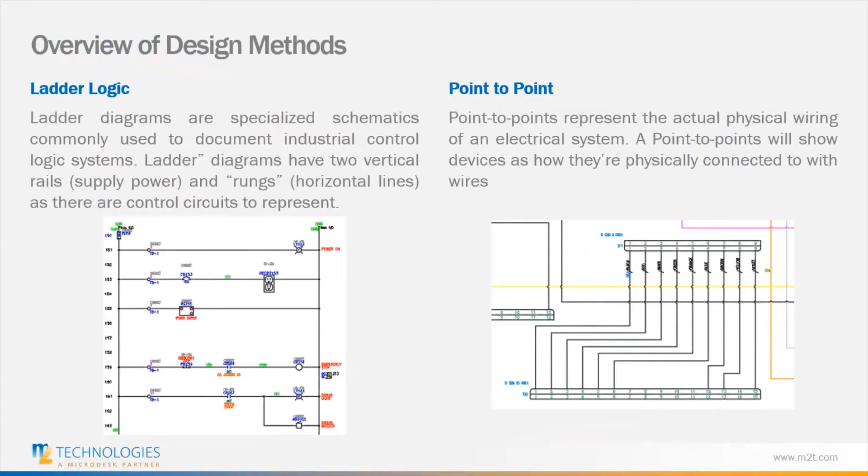And point to point is really straightforward. People could easily understand how it's connected together. Whereas the ladder logic, if you're looking at this, you may not know exactly how it's wired together. And there's some tools in there, like the wire sequences, that you really have to go through and manage so you get proper to-from reports out of a ladder logic document that you don't have to do when you're doing point-to-point wiring.

So the component library really is one of the most important things in AutoCAD Electrical, and it's the thing that's going to really drive you towards excellence in creating your designs. And that's because this library contains over 2,000 symbols out of the box for you, conforming to a wide variety of different standards. So anything from AS to GB, IEC, or more commonly in the States, the JIC and the NFPA, maybe IEEE too. You can see there's just a ton of standards built into here.

Now, the one thing that I think it could use some improvement on are the connectors, specifically when you're talking about the physical footprint and even the catalog database. Even though there's probably hundreds of thousands of components in the catalog database, it's probably not quite as in depth as you'd need if your focus is strictly on creating a point-to-point wiring schematic. And that's why I really want to explore that area first.

So, creating a custom component. I'm going to take you through some of the steps, not all the steps, but I'll make sure to give you the full picture. Inside of Electrical, there are several different pieces that go together to make a complete component. One of the first things is the actual symbol itself. Now the symbol really could be two symbols if you think about it. You could have a schematic representation, and hopefully you just use the connectors that are available from AutoCAD Electrical, although you could create custom schematic symbols too. But really, I'm focusing on the footprint side.

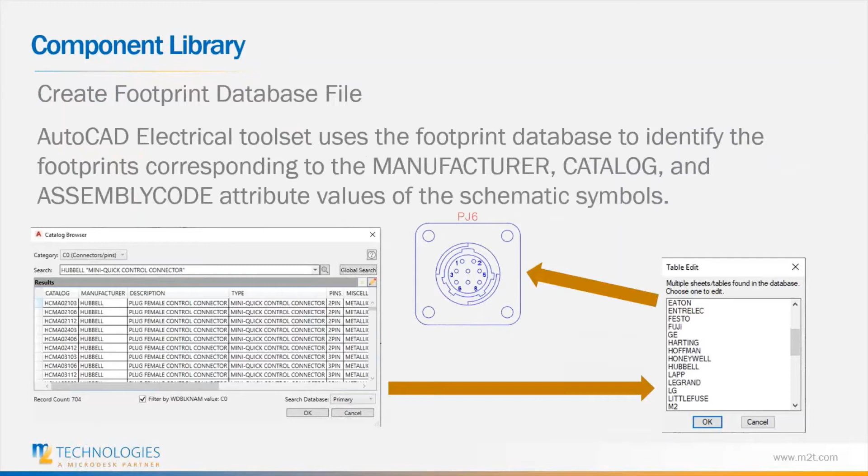And then you also have a footprint lookup database. Basically what that does is tie the manufacturer catalog number to a specific block, so it allows the software to be able to find it and place it. So you can see there's symbol creation, there's a catalog database, there's a footprint lookup database. There's 3 different pieces that generally have to be touched, and probably even 4 if you want to have it in the icon menu so you can place it easier. So 3 or 4 different pieces are involved in creating a custom component. Let's go ahead and take a look at the first piece.

So I'm inside of AutoCAD Electrical now, and I have some components that have already been created as AutoCAD Electrical blocks. So that process is really done for us already. But what I want to do is just maybe explode one of these so you can see it. I'll just select that component, explode it, and there you go. You can see it's the same type of information we just saw in the PowerPoint a moment before.

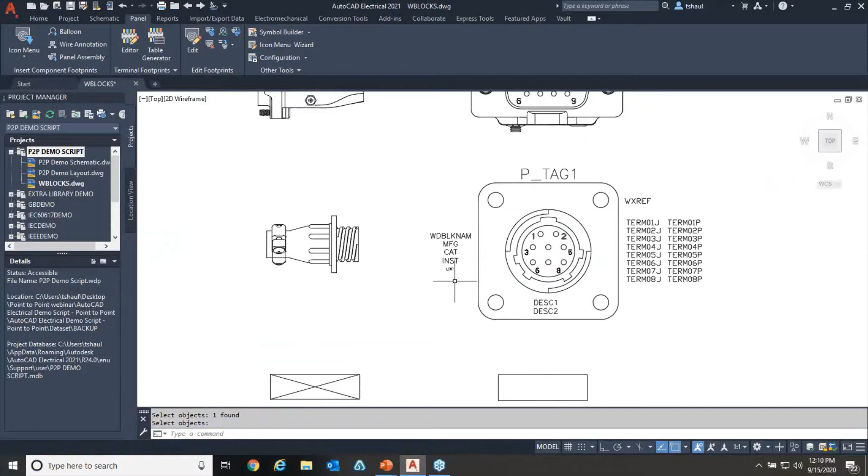So all these attributes that are associated to this block, super important. It's very important you follow the process to build the symbols properly. And this is something that we cover in our training. And the tool that you'd use to create that is called the Symbol Builder. The Symbol Builder is located on several different tabs here. On the Schematic tab, we have a Symbol Builder. On the Panel tab, we have a Symbol Builder.

And basically what it does is it's like an authoring tool using the block environment inside of AutoCAD Electrical, very similar to AutoCAD, and basically just has a palette that tells you what attributes should be added, and it makes it very easy to add those attributes to the component.

Okay, so I'm not going to go through that whole process, but just know it's called the Symbol Builder, and that's what you use to apply the block properties to specific geometry so you can build in the intelligence that you want into that symbol itself. And like I said, we do cover that in our training if you wanted to take the next step.

So with that part being done already, some of the other areas that have to be explored are maybe the footprint lookup database. You'll notice here in AutoCAD Electrical, we have several different tabs, a schematic tab and a panel tab, and a footprint is generally associated with the panel environment. So this is where you're going to find the tool to basically link up the catalog database to the actual component itself, the physical representation of that block. It's a little bit hidden here under the other tools.

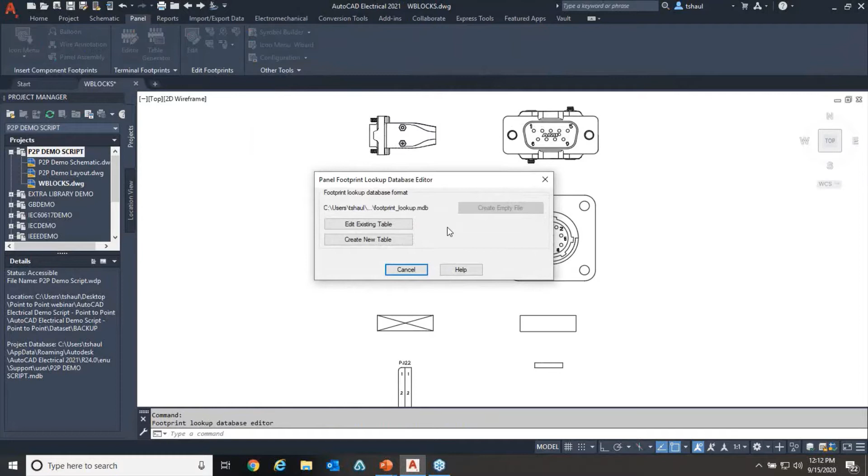And when I open this up, there's a couple different options. We could edit an existing table, or we could create a new table. In this case, I'm actually going to create a new table. I'm going to call that AMP for the type of symbols I'm creating. And we have this blank environment right now because I haven't created any of these components before. I'd say add new, and this is where I'm going to put in things like the catalog information.

So if I know this AMP part number starts with like a 205841-1, and I'm going to put an asterisk in here too. And basically, when you have components, and I'm going to use like a pilot light as an example, maybe you got a green one, a red one, a blue one, an orange one, a white one. They could be all sorts of different colors, but really the physical representation might be exactly the same for all those components. So the catalog number could be a variety of catalog numbers.

And basically by putting that asterisk in there, in this case, it's a wildcard. So it allows it to say anything that starts with these numbers specifically. However, after 1, it could be any number. It doesn't matter. And that would be a wide variety of different, maybe connectors in this case, or pilot lights as my example.

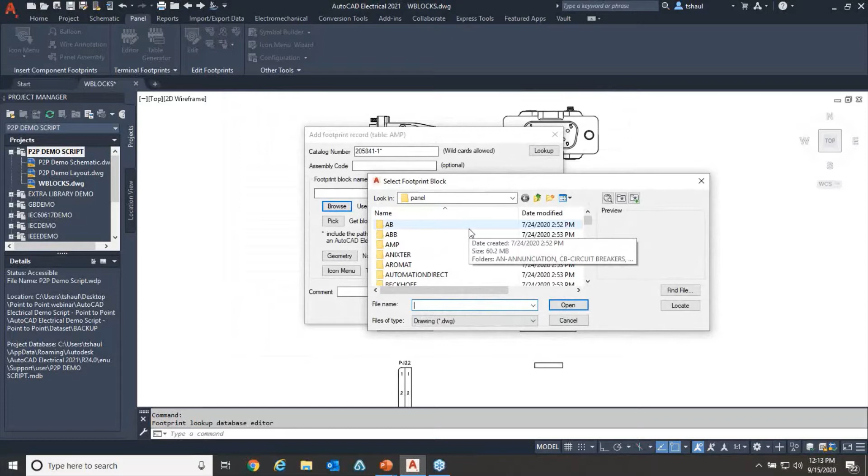Okay. The next thing I'm going to do is tell it what block should be used when I use that catalog number with the wildcards. So I'd browse out, and inside of AutoCAD Electrical, when you install it, there's 2,000 or more symbols. And I actually created a new folder here where I saved my previously created symbols. I'm going to go ahead and select the symbol that I'd like to use for this footprint. So anytime I use this catalog number, it's going to pull this footprint. Simply click OK, and now I've got a new one in there.

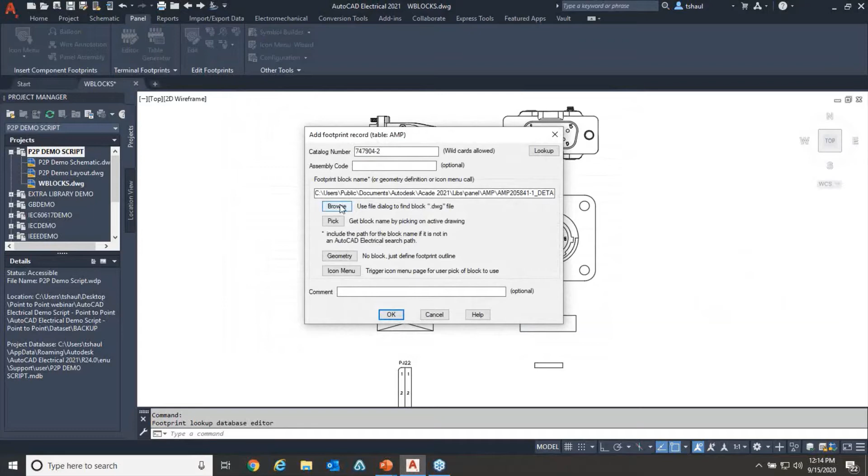And of course, I could add another record here. So maybe in this case, we've got a 747904-2. And again, I'm going to browse out, identify the block that I want to use with it, and click OK. And basically, that's what goes into setting up a relationship between the catalog database and the physical footprint representation of the symbol.

And the reason I wanted to make sure I showed this is because I believe this is one of the areas that could use some expansion in the standard catalog database. So you'll find that when you're doing point-to-point with connectors, especially something that you'd use on a cable, it's more likely that you're going to have to go through and create these custom symbols.

Okay, so I wanted to make sure to show that. Now, the next step in this process might involve actually placing these into an area of easy access. So if I'm going to use this connector a lot and I want to access it quickly, and when you're using AutoCAD Electrical, if you're not familiar with it, one of the most common ways to place a component is through the icon menu. So when I click on this, it's going to open up the icon menu, and this one's specific to the footprint environment.

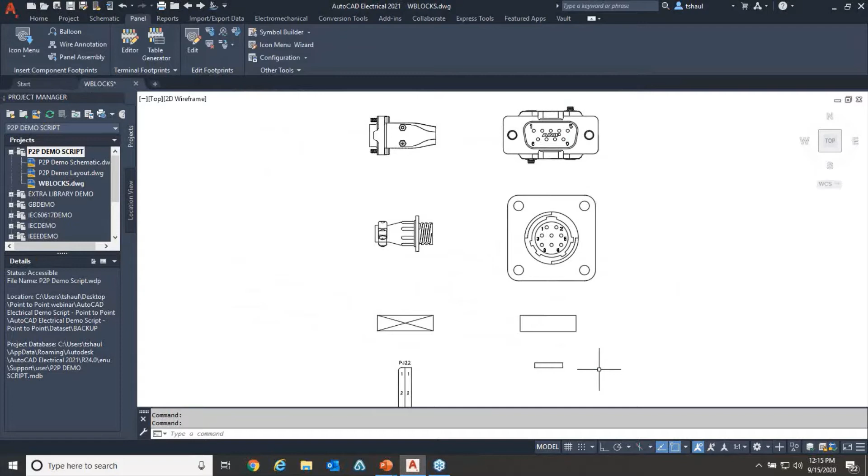You'll notice all the different types of components in here, and none of these really say connectors. Okay, so maybe what I want to do is create my own custom icon menu, submenu, and include the connectors that I just created, so they're easily placed into a design. Okay, and we do this through the icon menu wizard.

And there's several different icon menus to choose from. There's a schematic, there's a panel, there's actually a pneumatic and hydraulic and P&ID ones as well. You can even create your own custom ones if you want. In this case, I'm going to modify the standard one that's available out of the box. I'm going to go ahead and select OK here.

You can see basically the interface looks exactly the same. The only real difference here is you have this additional button in the upper right hand corner that says Add. And if I go in here, I can add several different things. I'm going to start off with a new submenu, and I'm going to call this just connectors. So connectors. Then I need an image.

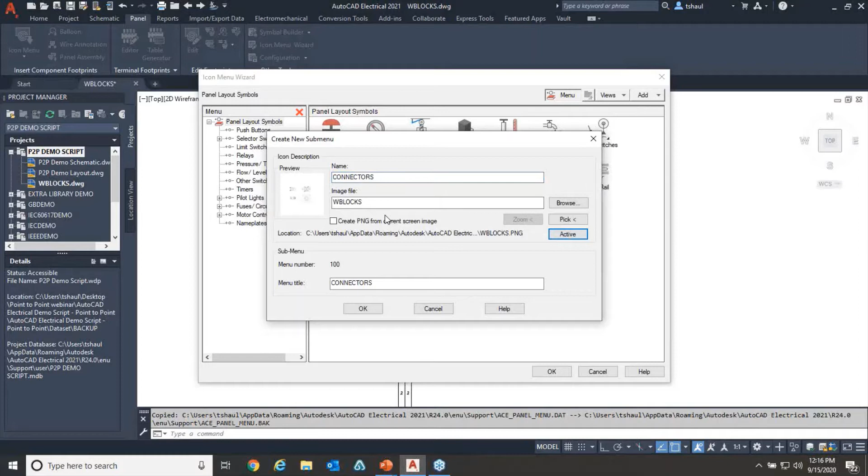I could use the active window if I want to, so it's going to grab a screen capture of the active window. A lot of times you'll find that you want to kind of modify and create the file ahead of time, so you get a nice, pretty image that stands out. You can see a lot of the images in the icon menu are probably created in like Microsoft Paint or something like that. This is simply just a screen capture in this case. I'm going to select OK, and you can see it doesn't stand out quite as nice. And then I'll dig into this submenu.

I'm going to select component, and this is how I could go through and add specific components now. So I'm going to call this connector-01. For the image file, I'm going to browse out. Let's say we want to use this one. So I've already pre-created that one. I was kind of zoomed in a little bit more.

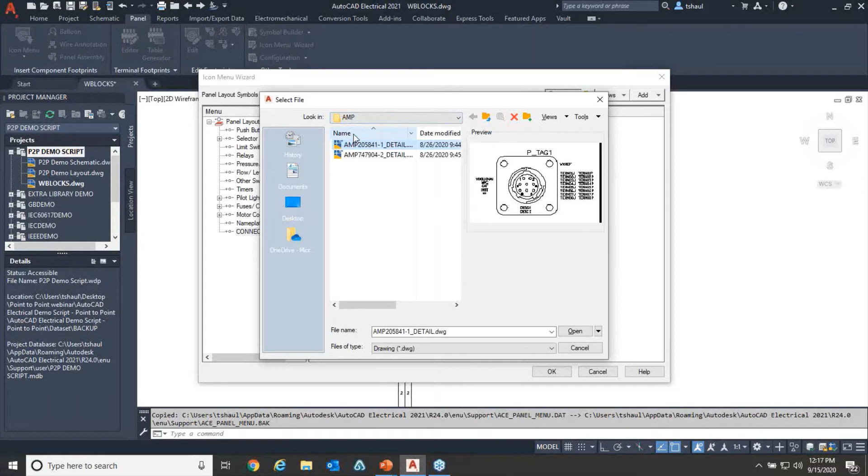And then I need to tell it what block is associated with it. So I'd navigate out. And again, these are just going to my AMP folder that I've created in my catalog location already. Going to select OK. Going to click OK. And basically now I have that new connector in there. And then I could, of course, continue on if I wanted to create another one here.

Maybe this would be connector 02. Again, I'll browse out. I'll just grab a screen capture that I created for it. Going to browse out and grab the appropriate block for that. And now you can see I've added those in there. And that message was basically saying I had done those ones before. So it remembers when I was preparing for this that I had already done that. So that's nothing to worry about. But basically, you can see it's a pretty simple process.

And when I click OK here, when I'm creating a panel or a cable in this case, I could go to the icon menu. And now I could go in and select from these different connectors. Now in this case, I only put one view in there. I could have certainly included multiple views for the same connector in there.

So if I needed a front and right side or left side or top view or whatever it happened to be, you can incorporate those all into the same symbol and just maintain the view that you want to keep, or even keep both views. That'd be okay too. So it all depends on what you're trying to achieve when you create these different schematic symbols and panel symbols and footprint layouts.

So I think you can see the process isn't really difficult. It does have several different pieces that are going to work together to create your final component. But once you get the process down, it's pretty straightforward. And most of the time, you can actually grab all the geometry from the manufacturer.

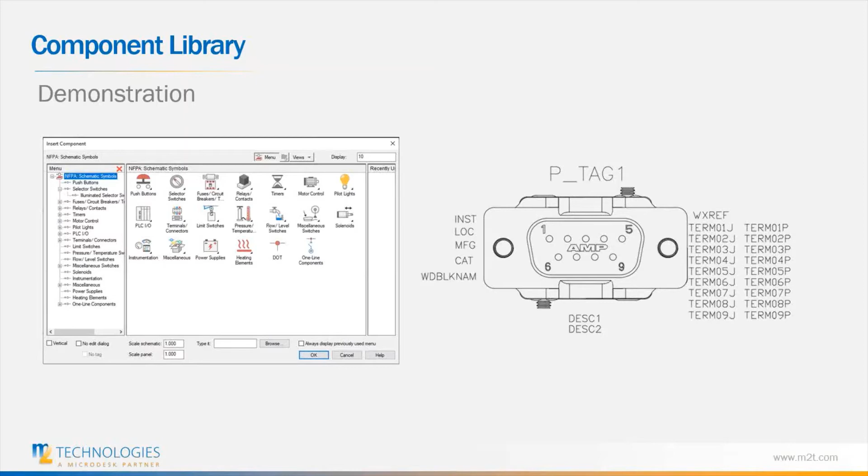So you could go to the manufacturer's site and usually just download these. The only thing you have to do afterwards is make sure you take it through the symbols wizard or icon wizard, so you can build those out and add all the attributes that you want to it. Okay, the symbols builder. So let's go ahead and move on to the next thing.

So once you've authored some of the components that you have, now it's time to maybe start the design. Now, I'm going to assume that we're going to start the design in the schematic environment. The schematic environment would involve that point-to-point connection, and the point-to-point connection you're going to make using what are called wires.

Okay, so if you're using AutoCAD today, if you're drawing a line, it isn't technically a wire, I guess. But a wire essentially is a layer, but it has a certain naming convention that the software recognizes, and that naming convention is what really gives it its intelligence — what color it is, what gauge it is. You can include a variety of different user parameters or properties into that naming convention too if you want, so it could be a really simple or complex naming convention, but generally at the root of it, it's a color, a gauge, and then it's applied to a specific wire layer. And that's how the software knows that it's a wire, because it exists on that wire layer.

Now you could insert wires individually, one at a time, or you could actually use some multiple wire bus commands, giving you the ability to insert multiple wires at a time.

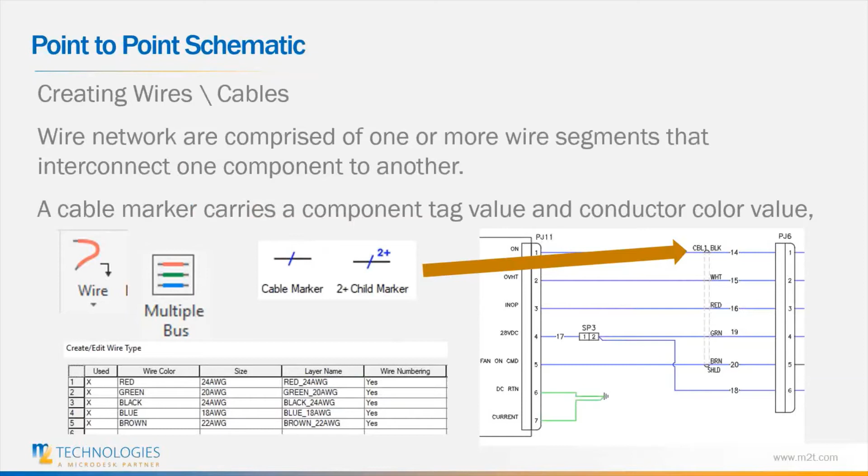So that's basically building a relationship between essentially wires. You drop in a parent marker that has the catalog data, then every conductor gets a second marker, which is considered a child. That makes sure you could build references between the parent and child, because you're not going to have the cable catalog number called out for each conductor — then you'd end up with 5 of the same cable. You don't want 5 parents in there; you want one parent with the catalog information, then all these conductors are children, which just inherit that same catalog information. So basically it's one catalog number as opposed to like 5, because you want your bill of materials to show properly as well.

Now, once you get your wires in there, you're probably going to want to number those wires. This is one of the big advantages of AutoCAD Electrical too — you can use the automatic wiring tools, and these wiring tools, the numbering specifically, has properties associated with it. So you could create what are called project definitions or project properties for how you would like to number things. And because in this case we're using a point-to-point wiring scheme, you'd typically use a sequential wire numbering scheme for those, so it just starts at, say, 1 and goes to 100, all in order. There's a number of different ones that are available from the system.

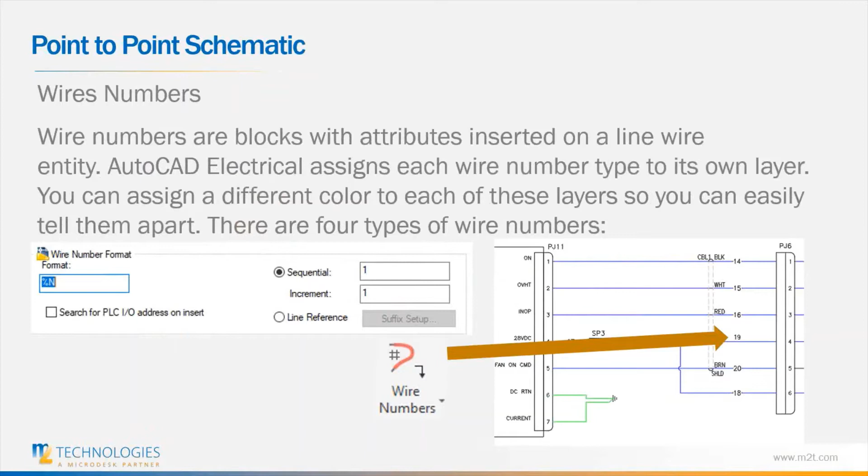So you could also do PLC I/O addressing — if you have some PLCs in there, it'll have the address as the wire number. And in other cases, say if you did have that ladder logic, that's when you generally use a reference line number, and you could apply those really quickly.

Now the next thing is the connectors. You don't have to create custom connectors in the system. So if you wanted that connector to look a certain way, I don't know that that would be necessary, because there's actually a connector tool built into the software that makes adding connectors very easy and very generic, as far as the schematic side.

Now on the footprint side, it's a different story. You want to create your custom footprints for those. But generally, out of the box, this connector command works just fine for the connectors you want to create. It really doesn't matter what they look like in the schematic, as long as they have pinpoints and maybe definitions for the pin locations. Doesn't really matter what they look like, okay?

Now, in this case, we're mostly focusing on connectors, but if you had a custom power supply with pin locations on it, you would probably want to create that as a schematic component and document all the pins and pin connection points. But in our case, since we're mostly focusing on a cable design, the connectors are what we really care about, and how we're going to apply the different wires and multi-wire bus to get to the final cable result in the layout.

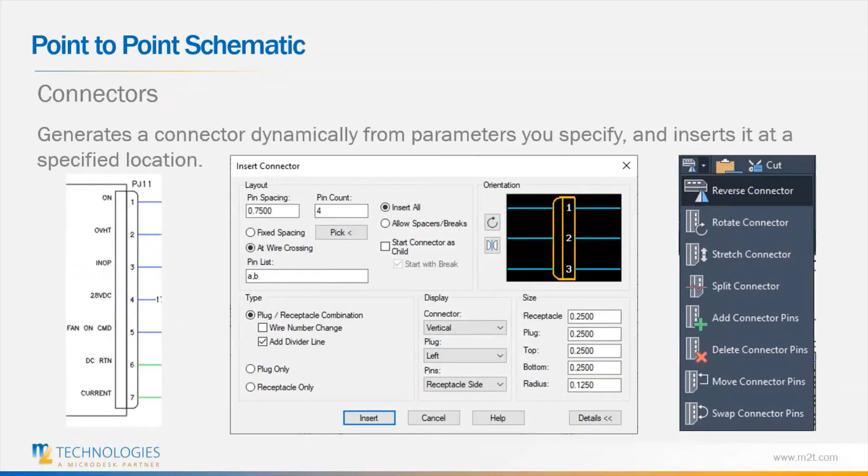Also, the connectors, since they are so flexible, offer a variety of editing tools. Once you place a connector in there, you can rotate it, stretch it, add additional pins, subtract pins, even move pins and swap pins around. You get a lot of control over it. If you create that power supply with those pinpoints, it's not going to have that type of flexibility. Or even if you created your own custom connector, it's pretty much going to be static, whereas this connector tool gives great flexibility in how you can add and work with those connectors. So I highly encourage people to use these connectors as much as you can. Don't create any extra work for yourself.

Okay, so let's go ahead and take a look at that. We're going to move off of this drawing sheet.

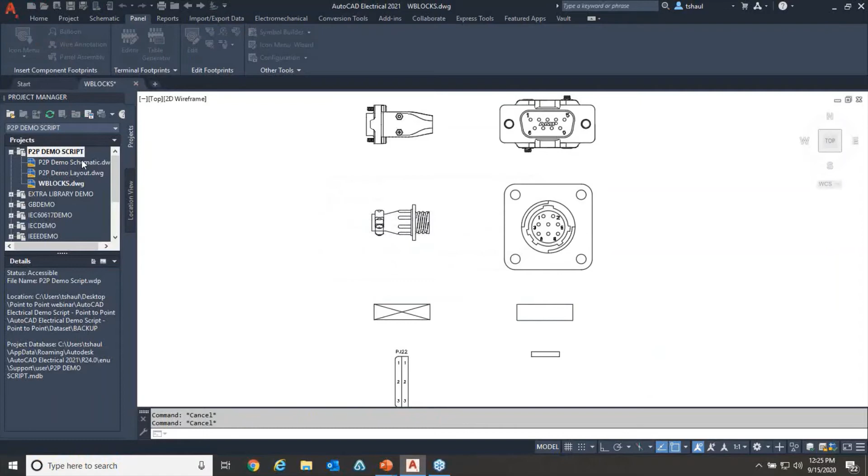Okay, so here we are in the schematic. In this particular case, what we're going to do is finish up this cooling fan circuit. So you can see down here we have a fan control PC assembly. Even though this is probably a purchase component, a connector was just inserted on top of it, so you could still take advantage of all those connector tools. So it really depends on how you want to leverage the tools.

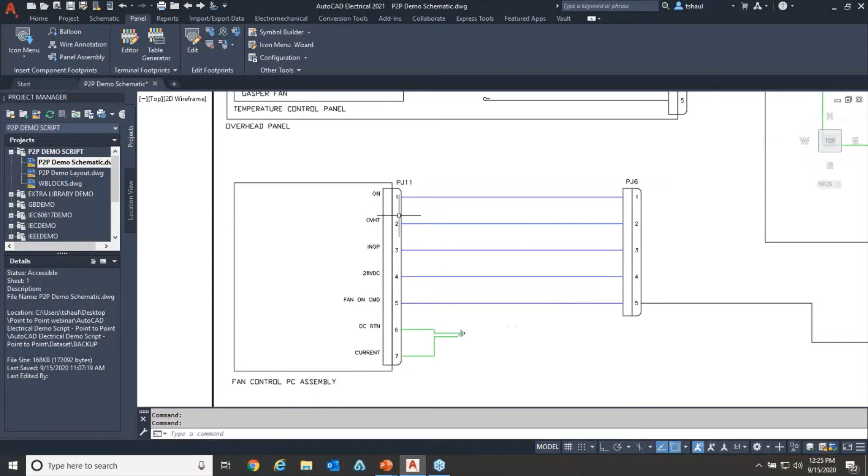The connectors make it really easy. We have some overhead panel here, a circuit breaker, some lighting distribution panel, just all these different areas. But really what it comes down to is we just want to finish this circuit, and our main focus is going to be on that fan temperature control. So the fan's going to kick on if it gets too hot.

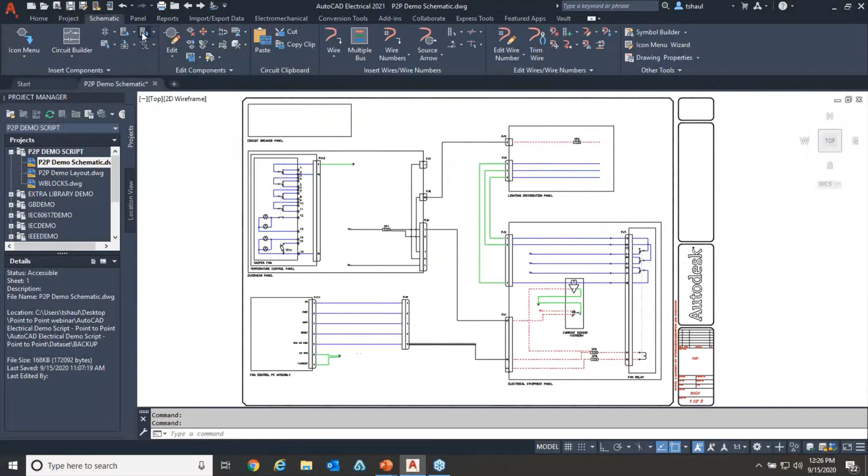So the first thing that I'm going to focus on here is the connector itself. Now the connector is actually found on the schematic tab, so this is a schematic tool, and it's on the insert components panel. I'm going to go ahead and select this, and there's a variety of different options in this dialog box.

The first thing that we're going to do is really define what we want this connector to be. So what's our pin spacing? In this case, 3/4 inch. That sounds pretty good. For the circuit breaker, we only need 2 pins, so I'm going to key in 2 pins. I'm also going to set this to be a fixed spacing, so regardless of where I place this into the design, it's always going to be 3/4 inch spacing between those pins.

I'm also going to create a pin list. So I want the pins to be 1, 5. And the reason I want to do 1, 5 is because this connector is going to have a parent-child relationship, just like I spoke about with that cable. It's nice to be able to do this because you could literally place the pins to a connector in multiple different locations in the context of your project, in the same drawing, or even maybe a different drawing. Doesn't really matter.

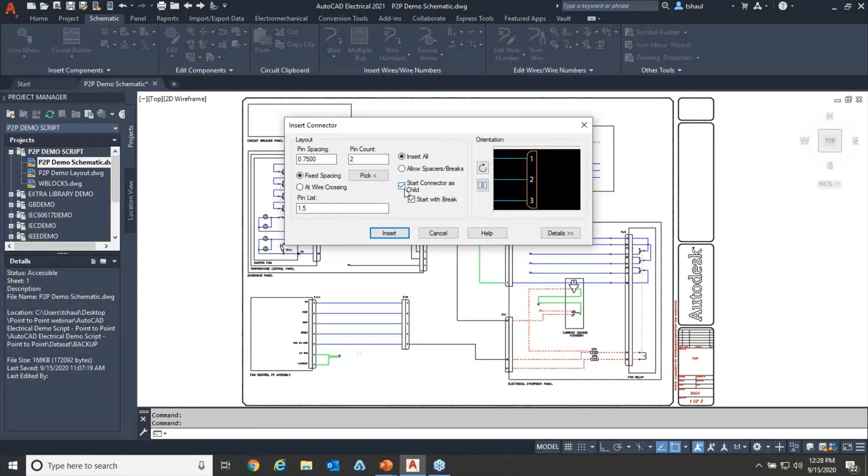Okay, and to turn on that child-parent relationship, right here, start connector as child. So this is going to be a child connector, which means I am going to have to build a relationship with this connector to the parent, where it's going to get all of its information from.

Okay, now in here I'm going to expand the details area a little bit, and I do want to place in both the plug and receptacle. You'll notice different options in here—you can do the plug side or receptacle side only, control the pin locations, whether you want those on the plug or receptacle side. There's lots of different options here. You can even control the size of the connector itself if you want to adjust the geometric values, and there's controls for positioning it, flipping it, and so on.

I'm going to leave it in that orientation right there. I think I've got everything I need—so 1 and 5, 2 pins, all child. Yep, looks good. I'm going to go ahead and insert this.

Basically when I insert this, it's going to be attached to my cursor, and you'll notice the arrow. The arrow is basically showing me what side it is—is it the receptacle or the plug side? In this case, I could tell the arrow is pointing the wrong direction. So even if you didn't have the direction set properly, you can use different tools on your keyboard to flip it—tab will flip it, or you can type V for horizontal or vertical.

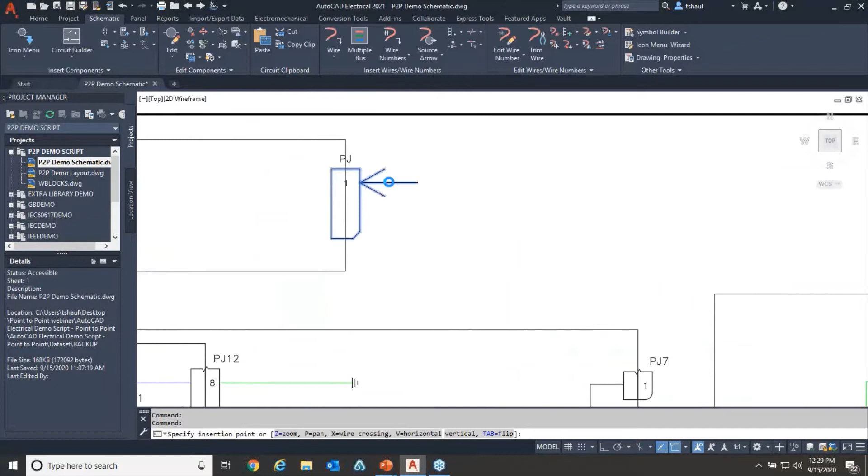Once you get it into the proper orientation, I'm going to go ahead and make sure this is connected right to my circuit breaker. Remember, my circuit breaker in this case is just this kind of generic reference—I really care about just that connector that's going to attach to it.

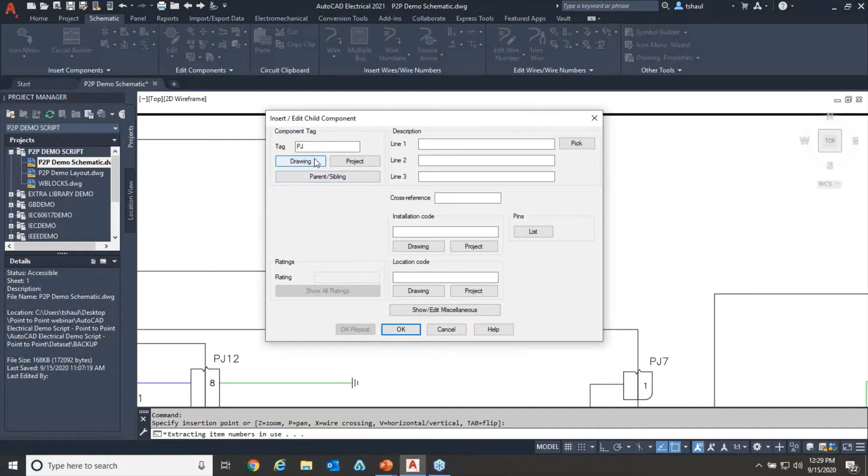Now in this case I have the child component insert and edit dialog box, and this is where you could build in that parent-sibling relationship. That sibling relationship can either be in the same drawing, across project drawings, or I can pick it from the existing drawing. In this case, I know I want this connector to be basically the same as this connector, so it's going to be a PJ8. You'll see in here it's automatically going to consume that kit tag, making it part of this component because it's a child—same component, one catalog number, spread across this drawing in multiple locations, or between drawing sheets too.

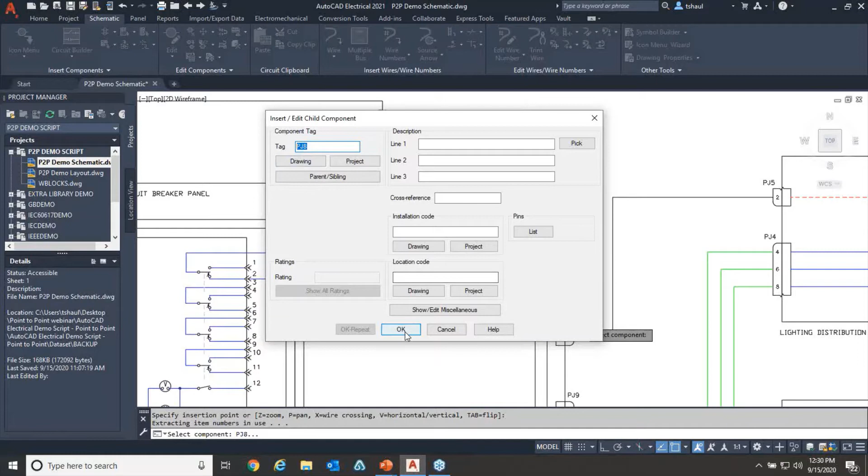So that looks pretty good, I'm going to go ahead and select OK. I've built in that relationship. I can see here that the tag didn't really end up in a great location, and keep in mind these are AutoCAD blocks, so it's going to have the default attribute location.

AutoCAD Electrical does offer a number of tools for working with those attributes after placement. In this case, I just want to do a simple move operation, but you can do a number of different operations with your attributed text after the fact. The cool thing is it's only going to affect the one block you've inserted there—if there are other blocks that are essentially the same, it has no effect on those or their attribute placement. It only affects the one I'm touching.

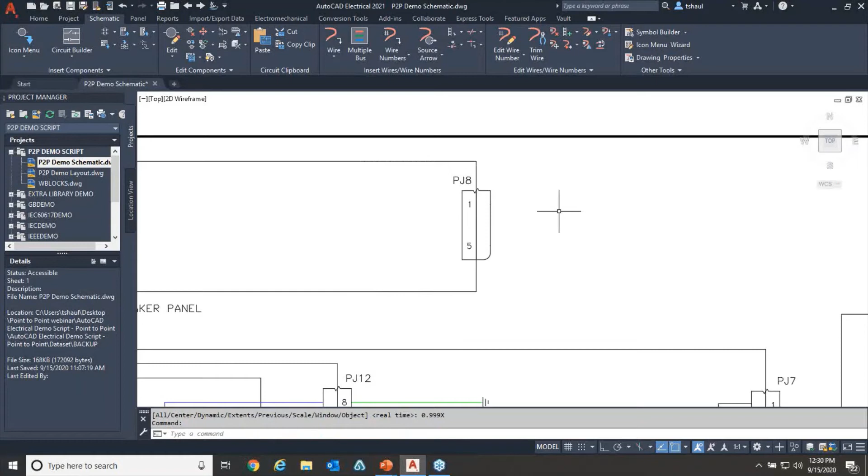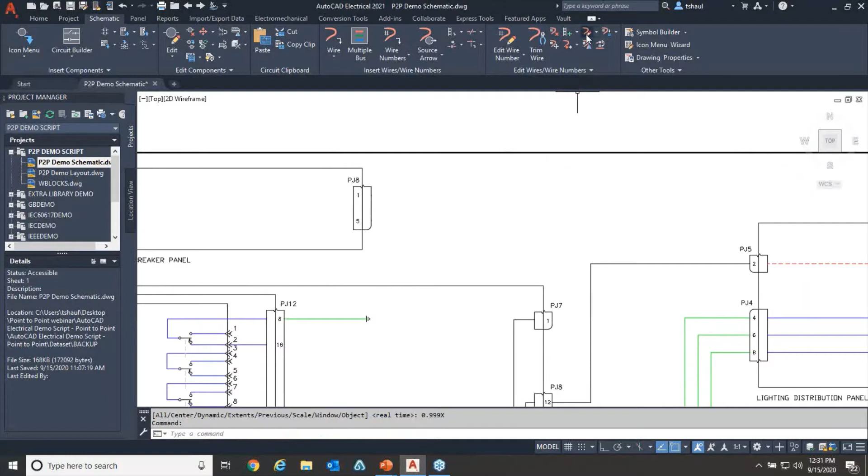All right, so let's start a little wiring here. The thing is, remember, wires and lines aren't the same thing. If you've worked with AutoCAD for years, you've been drawing lines and are very familiar with that rubber band line it creates at any angle, creating one line at a time. One of the first things that generally has to be done is the creation of wires.

Now, when I talk to customers, when I'm consulting with them and building out the wire types, usually we'll define a list that they want, and then as part of the template, we'll actually build these into the template.

For example, if I wanted another brown wire type here, I type in brown and hit tab, and you'll notice this is the layer name—it's going to fill that in. Then I'll go with the gauge, so maybe 18 AWG. So we've got two brown wires in this file and multiple other wire colors as well.

What I can do here is also adjust the layer properties, things like the color—so since I know this is a brown wire, maybe I'll select the brown color for that.

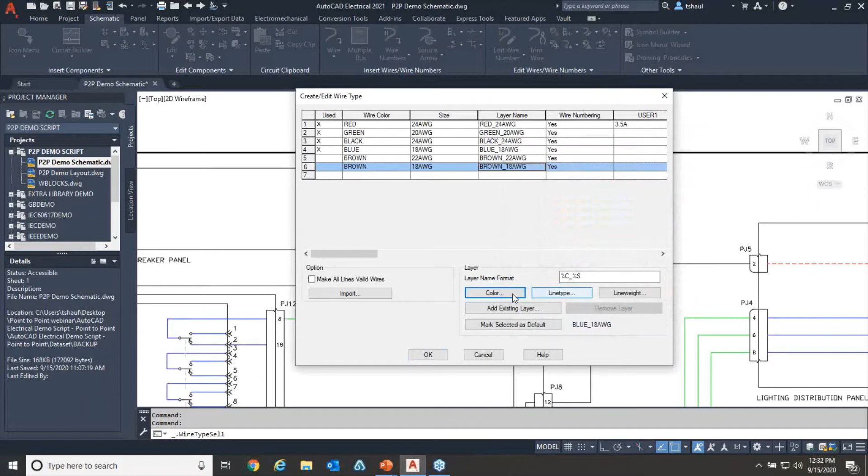I could also do different line types. I've run across a number of customers that have used hidden lines for field wiring and things like that. And you could certainly adjust this as needed for your needs. And once I have the wire configuration set in here, I'll just click OK. And now I'm ready to place a wire.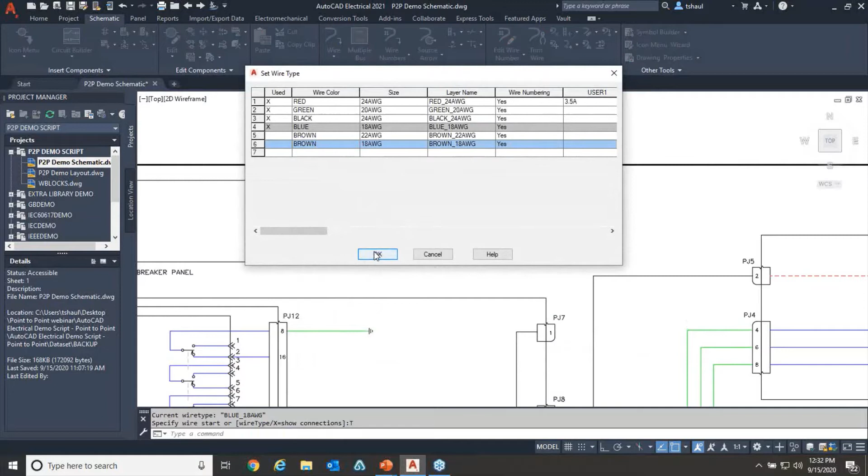So I'm going to place a single wire using the wire command. And what I want to do is make sure I'm using the right wire. Of course, you'll use one as the default, the one you use most frequently. But if I type in T, enter, this allows me to change the wire type as I'm placing a wire. So it's really handy. I could just come in here and say, okay, I want to use that brown 18 gauge wire that I just created. I'm going to select OK. And now I'm creating this wire.

And I'm just going to simply click over here. It's going to grab the connection point to the connector, and then I can drag this out. So look at how it's creating this wire. It's two line segments at a time at a minimum. So it's not like a line command where you're just doing point to point. And even beyond that, if I come down here and say I want to connect to this other connector, it has some avoidance technology built in. So it understands that this connection should go straight into that connector. So it's going to add an additional wire segment and also try to avoid anything that's in the way.

Now, does it avoid everything all the time? Well, not really, but it does help you in many cases to make it easier to insert your wires because it's using that technology to avoid other wires and connectors. Sometimes things can't be avoided. All right, so you can see there, very quick and easy. I was able to go in and create a new wire type and insert that. Looks good, but there's still a couple more connectors that I need to create.

So I'm going to slide over a little bit. You can see we have our lighting distribution panel, and we want to place another connector in here. So I'm going to go back to my connector command, and in this case it's not a child component, and it's going to have four. You can see there's four wires out there that I want to connect it to. The pin list is a little bit different. It's going to be an alpha pin list, so A and B.

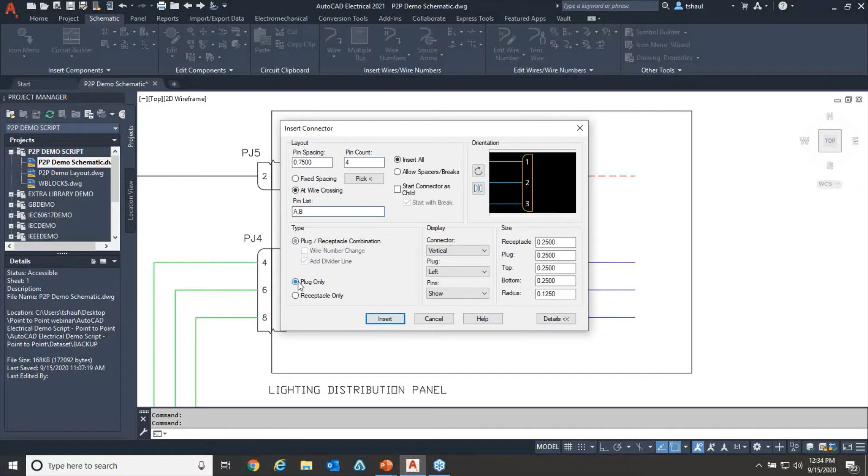And one of the most important things here is the at wire crossing option. What that's going to allow the connector to do is be more flexible. So if you've already got the wires in there, and maybe they're even at different spacings, like this example here, you can see we've got the red wire up there, and then these three blue ones down there, it can accommodate for that. And also in this case, I'm just going to place the plug side. So I'm going to go ahead and insert this.

And you'll notice I've got it attached to my cursor again. And if I go up to this wire at the very top, it's going to highlight. It's a little hard to see there. There's a little graphical change that you see in the connector. But if I click, what you'll notice is it's going to put all those pins wherever it crosses a wire, which is really handy. If you've got a ton of wires in there already, you have the design in there the way you want, the connector conforms to whatever is already existing. So really flexible and easy to place in there.

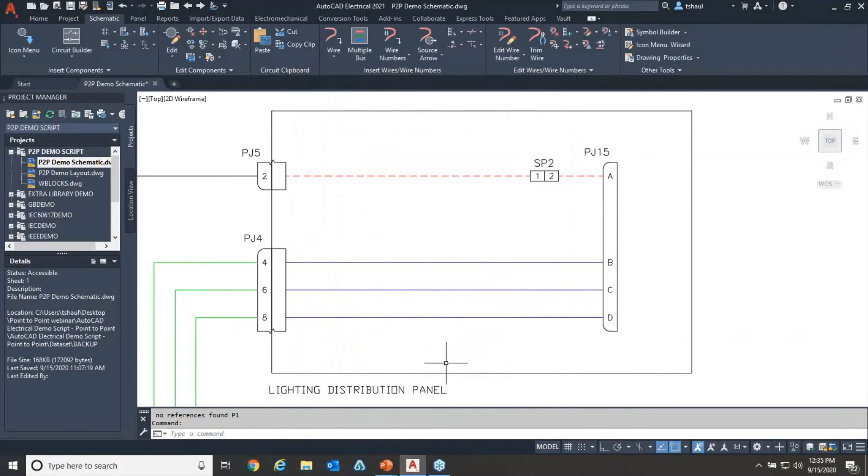And there it is. And you know what? Let me go ahead and just change this connector tag. So this is going to be a PJ15. Let's click OK. There we are. So we got that connector in there. And if I pan down a little bit, let's take a look at our fan control.

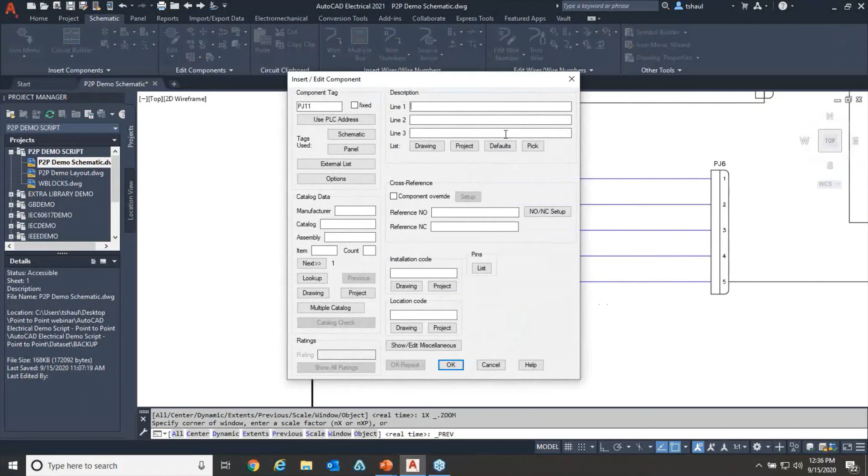And if I right click, edit components, this is how you get into the edit insert component dialog box. And this dialog box here is the parent version. You noticed before we saw the child version first; they look a little bit different. And that's because the parent is where all this really important information is being added. And in here we also have things like pins. So each one of these pins can have its own description, and in this case you can see it says on. We actually want to change that to off.

And click OK. And now it says off in this location as opposed to on. So you can have all these descriptions show next to your connector so you can see exactly how things are being connected and used together.

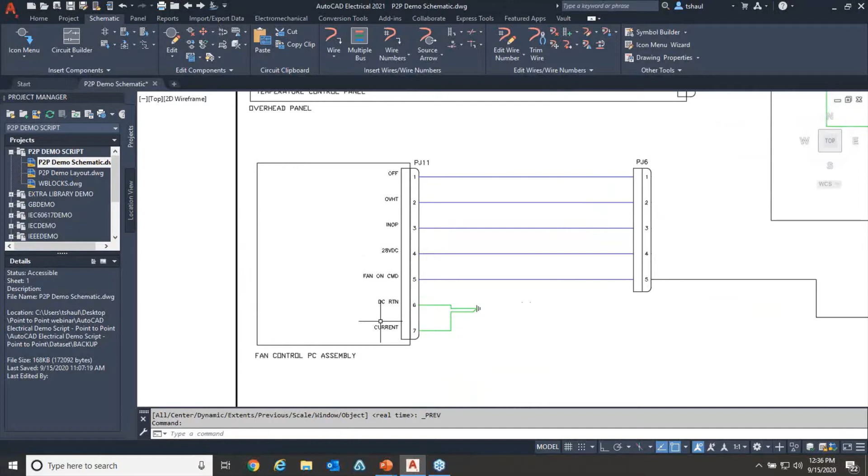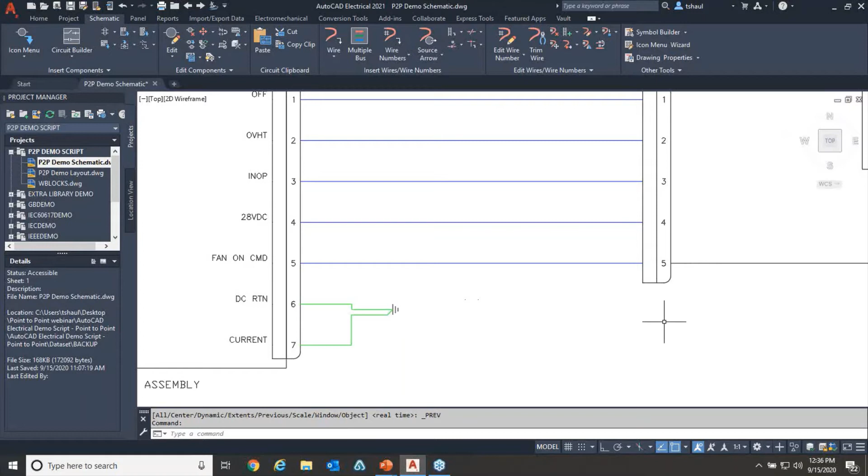Okay. So everything's looking pretty good here, but maybe we realized that we need two wires that have 28 volts, okay? And right now we only have one, so we've got this one 28 volt lead, it's on pin 4, and we want that 28 volt to be connected to the same connector in a different pin location because of how we're going to wire this thing. And right now that's a little bit of a problem.

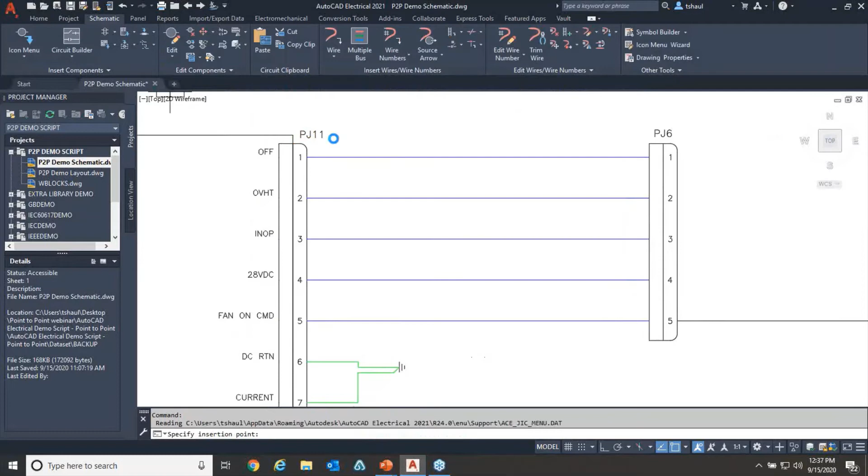So the first thing is, okay, well, we're going to splice into this wire, and then we're going to make a connection back into that same connector. So there actually is an insert splice command, and that takes you into that icon menu we talked about before when we created those custom footprints. And the splice is just like any other catalog component, and I could select that, and we're going to go ahead and place that right onto our 28 volts.

In here, we could apply catalog information and descriptions. In this case, we're going to keep it pretty straightforward. We're just going to drop it straight in there. But I still have the problem of this connector doesn't have 6 pins. Okay, and if you're using standard AutoCAD, maybe you'd have to delete that connector and insert a different connector or go through some other editing tools. But keep in mind, this is an intelligent symbol that's already inserted into the design. And what I want to do is go ahead and just update that.

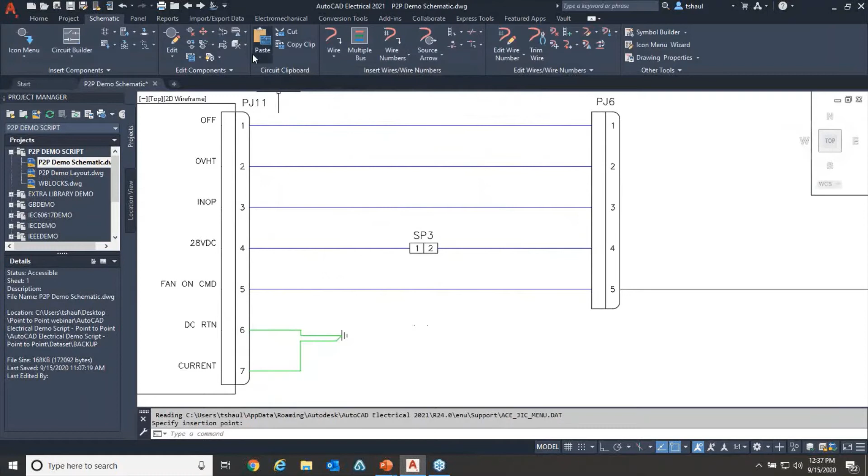And there are a lot of different editing tools that we have available to us for these connectors. One of these is the stretch. So I can simply use the stretch command, pick on that connector, and just drag this out to a new desired length. That was quick and easy. And then the next thing is, well, you know what? I need to add another pin. So you can see in here, one of the options is to add a new connector pin, but I could also remove and swap and do other things to pins as well. In this case, that's the connector, and I'm going to drop this pin in now, right about there. So wherever you click, it's going to drop that new pin into that location.

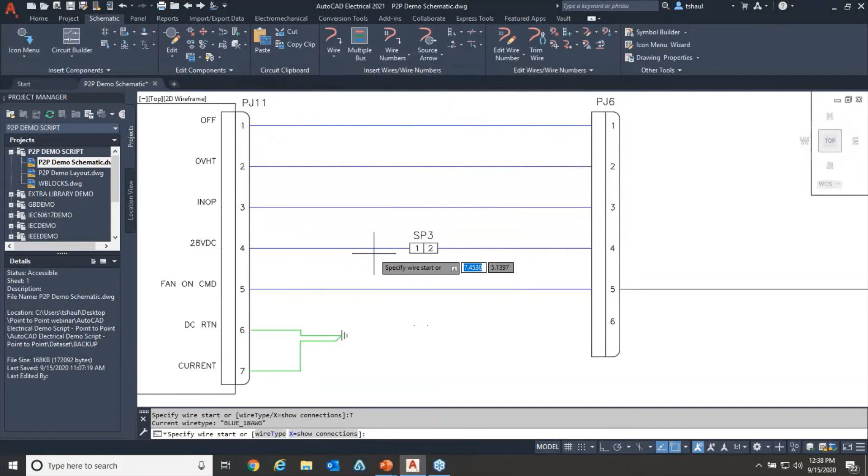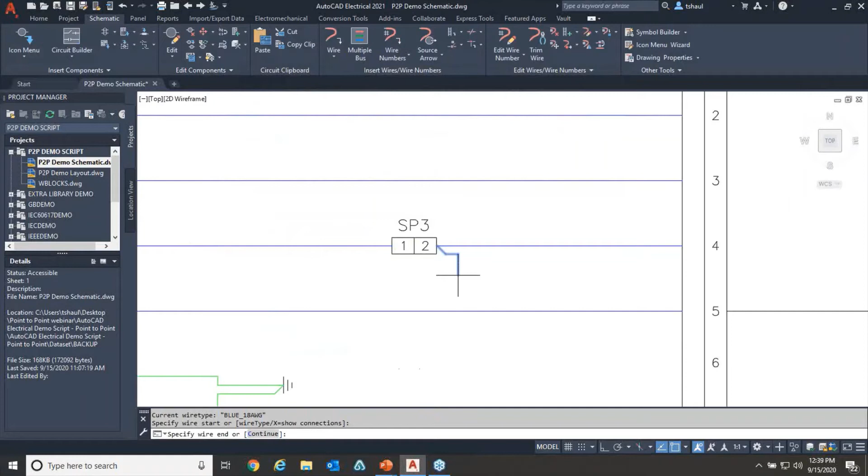And of course, now I want to make sure I can wire this up. So I'm going to go back to the wire command. And before I place a wire, I'm going to check my wire type. In this case, I want to use a blue wire. And then I'm going to connect that to my splice. And you can see here, the software is smart enough to know that I'm not going to come straight into the splice component with a straight line because there's already a wire connected to it. So it's going to avoid that overlap of those two wires and automatically put in a 45-degree wire. There's also other options like a 30-degree and a 60-degree that are built into the software too.

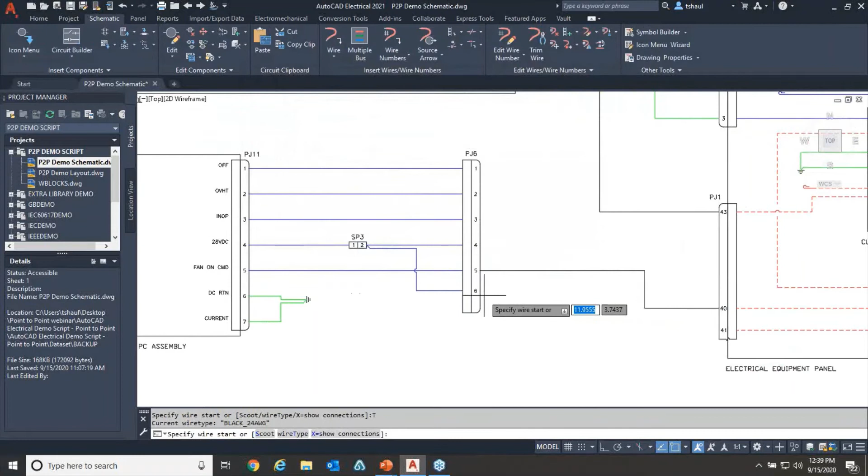And wherever I put that pin, you'll notice I can get that to flip around and connect to that pinpoint really easily. Now, of course, I want to continue that over to the next connector. So I'm going to type in T, enter again, and just change this to a black wire now. Going to connect to pin 6. That's going to go down here to pin 41. All right, looking good so far. Now, the next thing is I do need to connect all these pins of PJ6 up here to PJ9.

And you can see there's a little crowding going on here. You can see this wire here is kind of placed in the middle, and I want to add these 4 new wires. It doesn't give us a whole lot of space, okay? So there's a lot of editing tools that are available inside of AutoCAD Electrical, and the one that I'm going to use here is called the scoot command. And the scoot command is basically a conditional move, okay?

It's really nice. What I can do is just select the wire segment I want to move, and I could simply scoot it over just like that. So down here too, if I wanted to scoot this one over a little bit, you can see even though it's got that wire loop in there and it's actually multiple wire segments, it's very easy to slide over. And maybe I've even decided that this splice really isn't a good location. I'm just going to grab that and scoot that over too. And you can see very easily I can adjust and move things around.

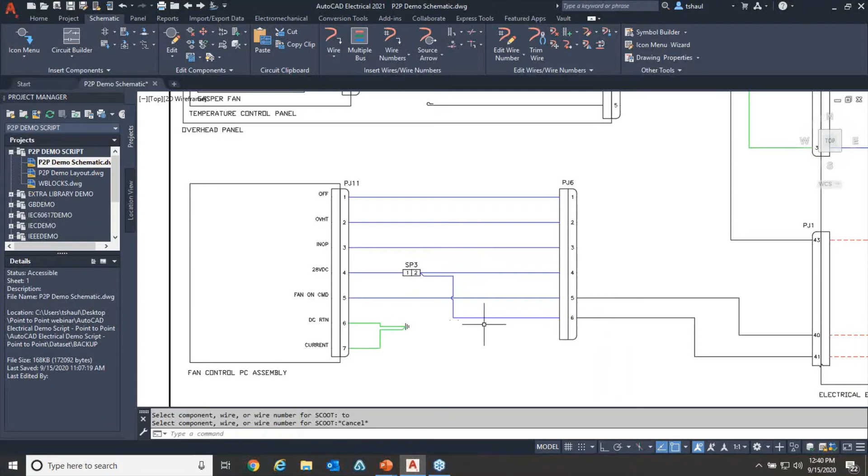And the scoot is that conditional move. So that component, like the splice, is only going to slide on the wire. And it's only going to let me slide it to the extent of that wire or to where another component is. It's not going to let me move it past it. So it's a conditional move command, basically. Okay, so now I've got enough space in here.

And I'm going to go ahead and connect PJ6 to PJ9 up there. Using the wire command, I could certainly do that. But do I want to create 4 independent wires? That would probably take quite the process, or at least some extra work. And I'm all about making things quick. So this is where you could use the multiple wire bus command.

And inside of this command, it allows us to place multiple wires at a time. These wires can be connected to another bus. They can be dropped in empty space. Or in our example, we're going to connect these to existing components, okay? So existing components is good. Gonna select OK. A little hard to see because my background color is white, but basically it's put these little green X's everywhere, and those are all the potential points I can connect to.

And I'm simply gonna draw a window around those 4 pinpoints. You can see they then turn red. Those are the 4 that I want in this case. So I'll just hit enter. There's no more to add. And once I hit enter, now I'm creating that multiple wire bus. Okay, I can move my cursor around.

Now these act a little bit differently than a single wire because they are a little bit more complicated. You'll see here they're not going to automatically turn for me. However, there's a bunch of commands that you could use, and whenever there's extra options, you always need to make sure you check the command line. So in this case, I could continue or flip these. The first thing I want to do is flip them because I don't want to change the order. So if I type in F, then enter, you can see now it's flipped them. So now the wires aren't crossing anymore.

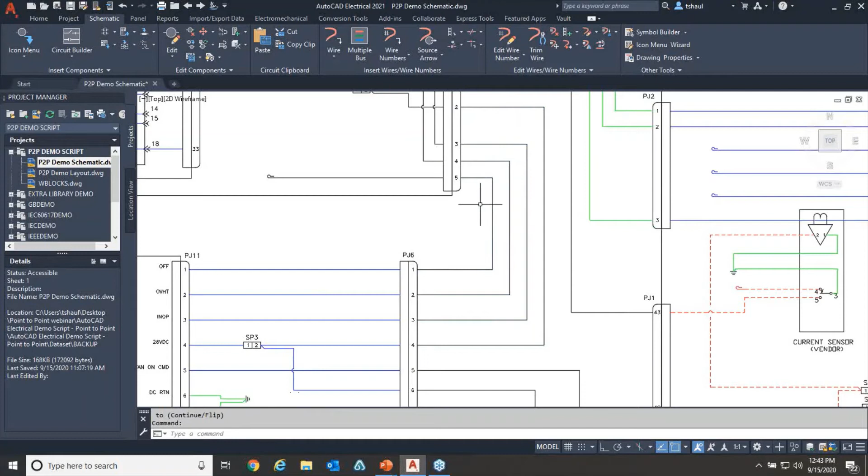And now I'll get it positioned where I want it, kind of in the middle here between the connector and that other wire to the right. And then I use the C enter command, which allows me to turn it the other direction. Now watch what happens to the wire spacing here too. As I go to the connector, you can see it's automatically going to space because I used that component connection option. So just like the connector can adjust to the wires, the multiple wire bus command can also adjust to the connector wherever you've placed those pins, especially if you've manually placed those pins and maybe they're not exactly half an inch apart.

Okay. So I have all the wiring done at this point. This looks pretty good. I like it. The circuit is done. But what about those pesky wire numbers? Now, if you've used AutoCAD in the past, you know placing wire numbers was painful, let's face it, because essentially you're putting in manual text entities for each one of those wires.

Now, inside of AutoCAD Electrical, we have project properties, and these are for determining the wire numbers. So %N basically just stands for number, okay? And that number is going to conform to a standard. Now that standard can be a PLC IO address. It could be a line reference, so it could be an XY or X zone location, or a ladder reference number, which clearly we don't have in point-to-point wiring. So in this case, we're going to use the sequential numbering.

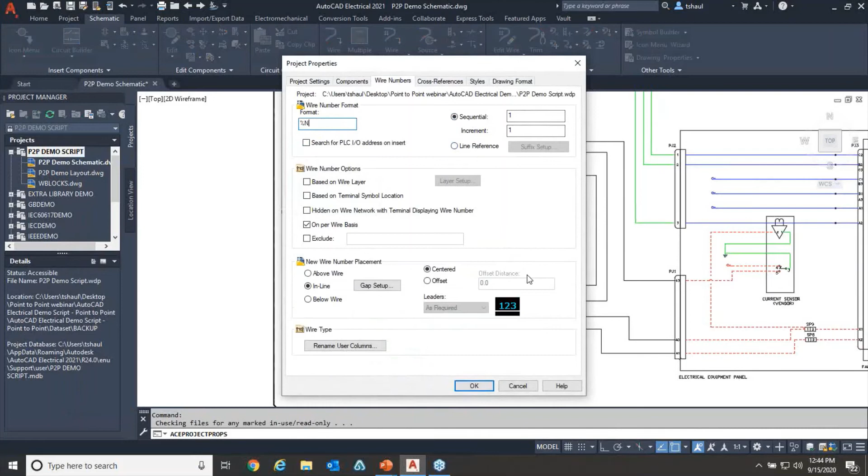So basically starting at 1, and then every wire it goes to, it goes up indexes by an increment of 1, because that is the default. To apply wire numbers to this drawing, and I just want to point out, I think some were already applied to this project, but when I go to wire numbers, what we're going to do is say we're going to start this at number 10 in this case.

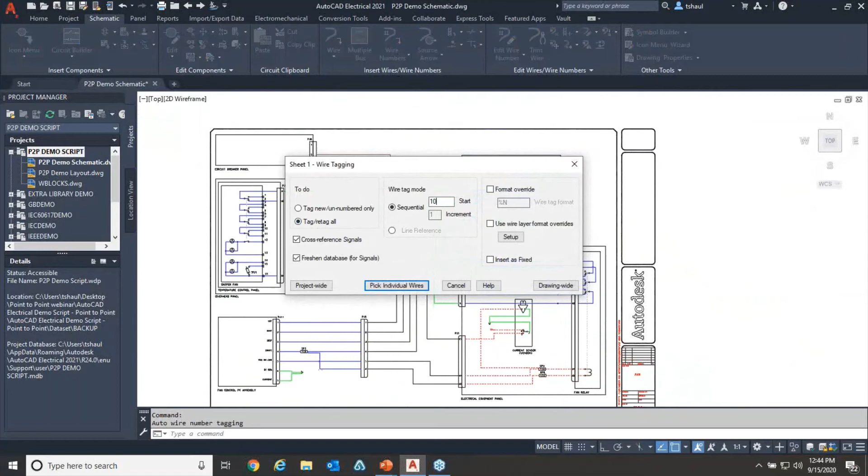And if you already wire numbered some of your project, maybe you want to make sure that you don't try to apply wire numbers to the same wire twice or things like that. What I'm going to do is actually use a pick option, okay, pick individual wires. And this is nice if you want to be very selective in what you're doing. In this case, we really care about the cable, the end result. And the cable we care about is in between these two connectors.

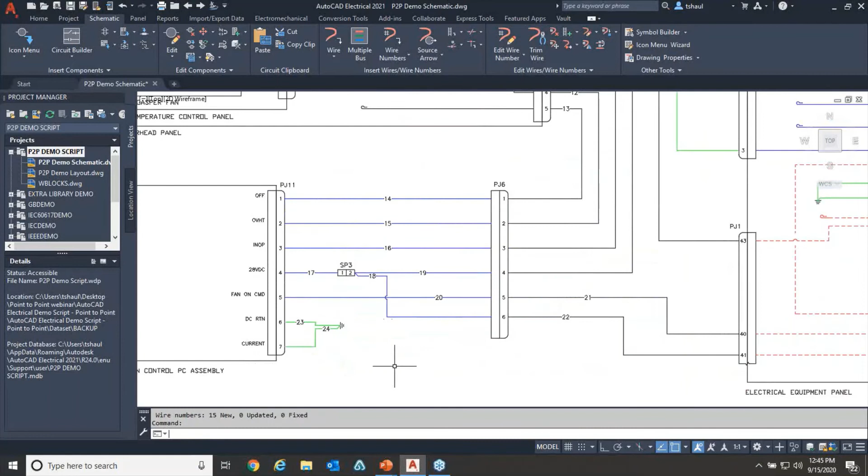So it's this connector, that connector. And we want to make sure all these things have some proper wire numbers. Maybe the wires on the other side of this connector too, so we could see some connection information. So I'll just highlight the ones I want to wire number in this case. I'm going to hit enter. And then AutoCAD Electrical is going to go to work, and it's going to apply all those wire numbers for us automatically.

Now, once we get those in there, we may want to make a few adjustments. You can see how it's applied these wire numbers. Maybe they're not exactly where we want. So we have a lot of different commands in here. One of those is move wire number, and I simply just pick a new place on the same wire where I want to move it to. You know, maybe I want to move this one down there. We also have some options just for sliding these around. Oops. We could use the scoot command, so I can scoot, say, number 19 over a little bit, like so.

So we have move wire number, which you just pick the wire any place, and it'll move the wire number to that place. You can use the scoot command to scoot those wire numbers around. But maybe we also want a nice clean drawing. So this is where we could maybe use an align function. So I can go through, select the master one, pick all the other wire numbers I want to align to it, and simply hit enter. And it's going to bring all those wire numbers into alignment.

Okay, once those things are into alignment, I'm now ready to apply my cable information. So we're finally getting to that cable that we want to place. So we've got the connector on either side. We've got all the wire numbers in here. We understand how this thing is designed. Now what I'm going to do is go to the cable command. And there's a number of different cables to pick from in here. I could pick a parent, create a child for one of the conductors. In this case, I'm going to use a shielded cable.

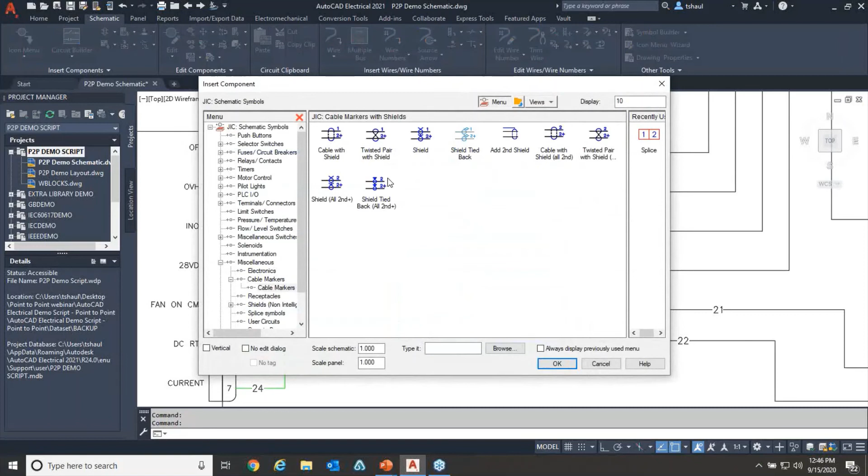And I'm also going to type in F enter, just so you know. And this is going to be a fenced insertion. So it makes it nice and easy. I could just pick one point. Maybe I'll turn on my ortho mode, make sure I'm drawing a nice straight line. And essentially, that is my cable right there. You can see it put X's on all those. I'm going to hit enter. And it's going to open up the insert edit dialog box.

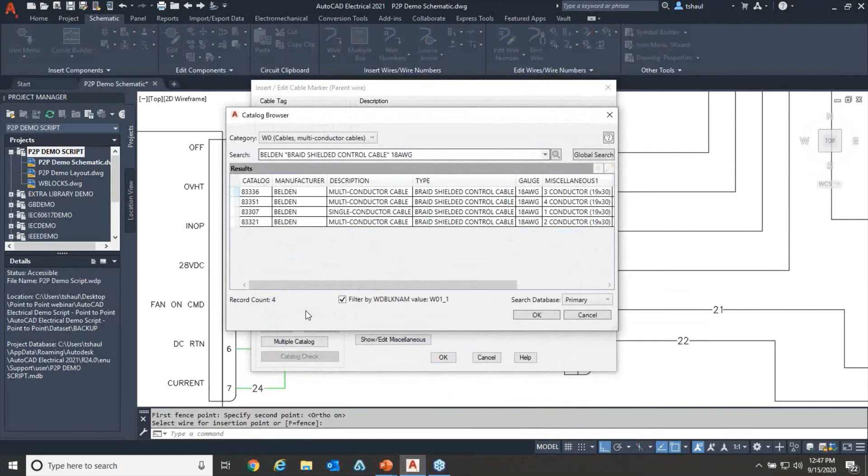Once I have this dialog box open, this is one I'm actually going to apply some catalog data to, okay? So just to show you, I'm going to backspace this, and usually you search for your cable information. I'm just going to search. So you can see there's over 15,000 catalog items for cables in the database, okay? And what you do is use the different search criteria to go out and find your specific cable. Now in this case, I know the cable catalog number, which is an 8445.

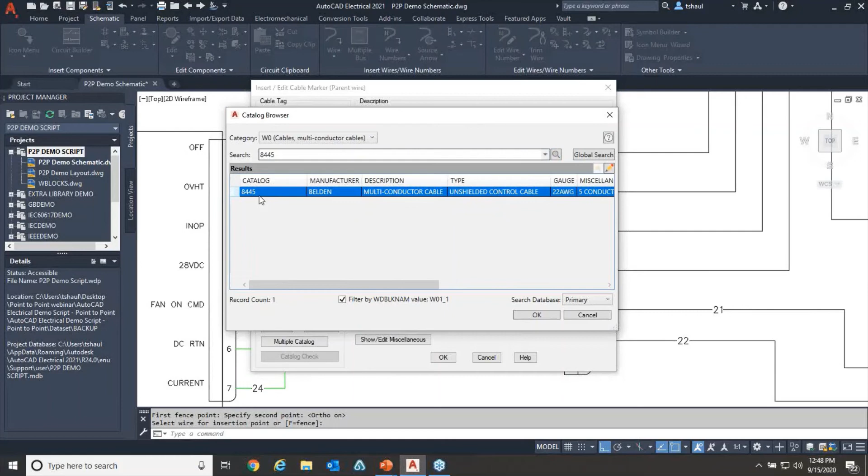So you could search by catalog number, you could search by description, type, gauge, miscellaneous information. There's a ton of different fields in here you could use to search. And what that is going to do is reduce your record count so you could find the one that you need. Or maybe it doesn't really matter and you could pick from a list. Maybe if you search for a multi-conductor cable that's 22 gauge per conductor, maybe there's only 20 results, and then you could just pick one from the list. So I'm going to go ahead and assign that, click OK, and click OK, and now it has some catalog data associated with it. I'm going to go ahead and just save this now.

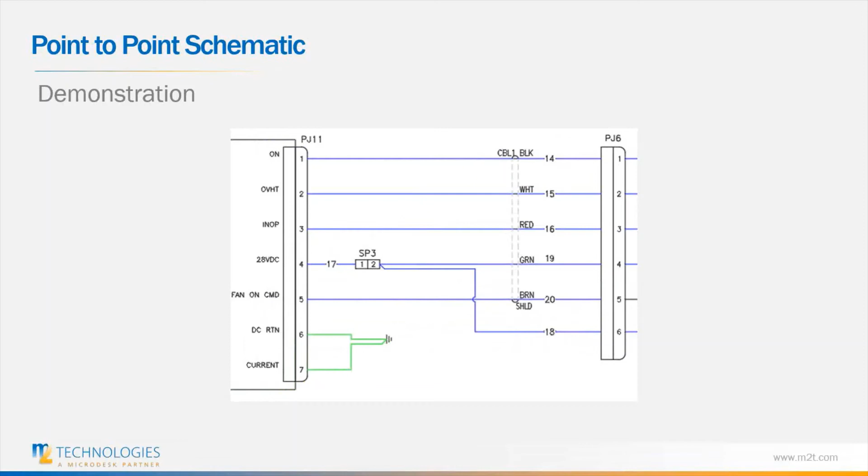All right, so that was the schematic side of it. So we went through, we created wires and connectors and wire types, and finally that cable. And now what we want to do is bring it all together as a layout. So we want all that cable information in a layout. And that layout is going to be basically using footprints that we've seen, that we've created, and we can understand those, and building basically this bi-directional link between the schematic and that layout environment.

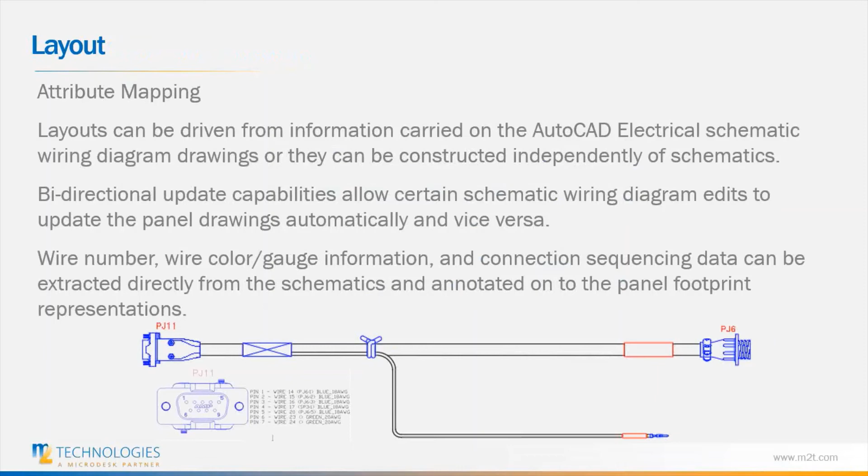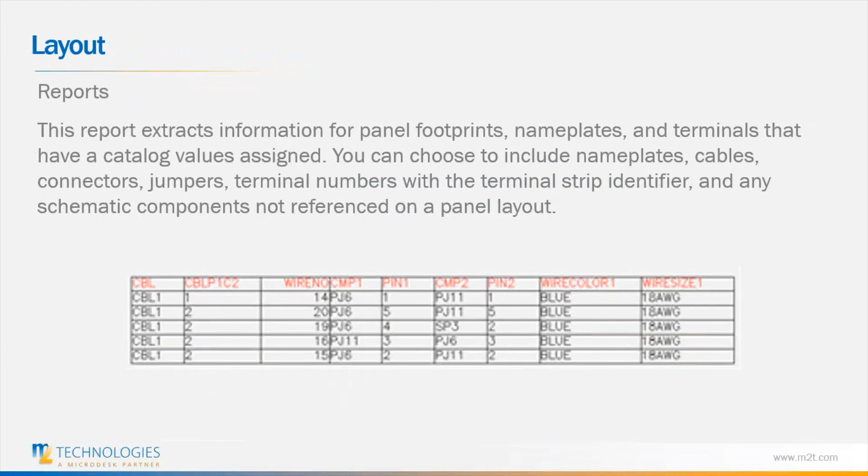So the layout environment can be anything. It could be as simple as that connector, or it could be that power supply, it could be an enclosure, it can be a push button, whatever it happens to be, you could build in these bi-directional links. Beyond that, as long as you're entering and connecting things together, you know, catalog information, you're connecting the wires from one connector to another, all that information is going to be captured and can be reported back to you. And there's several different ways to report that information. So let's go ahead and take a look at this.

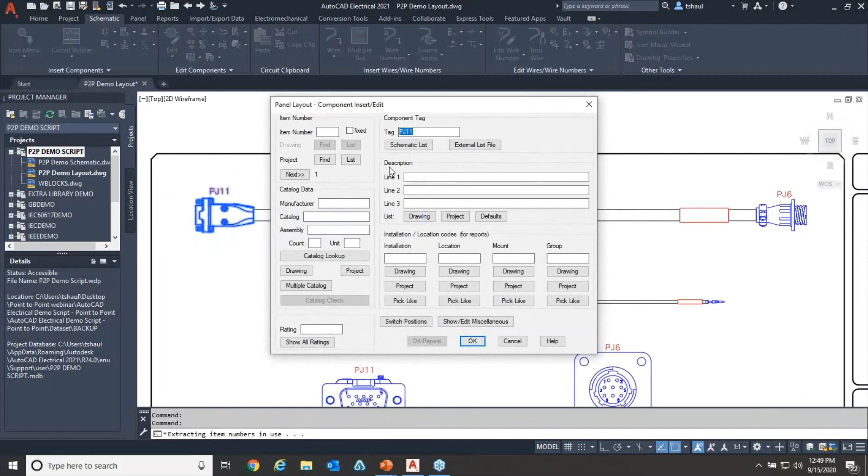I'm going to go ahead and just switch my drawing here. Okay, so here we go. What I want to point out is the connectors already have been connected together with that link. And the process is the same, so I didn't want to go through it like 4 times. And if I just right click on this and edit footprint, you can see basically it's got that same tag, PJ11 on one side, PJ6 on the other. That's the connection between those two connectors.

Okay, so let me show you how to build this link, and it's actually a pretty simple process. So this here represents our splice. Let me do this one first. So I'm just going to go ahead and edit this footprint, and up here it says component tag. And if you keyed in a value here, it's not linked to anything. And that's where a lot of people make the mistake in trying to build this relationship. You don't want to enter a tag here.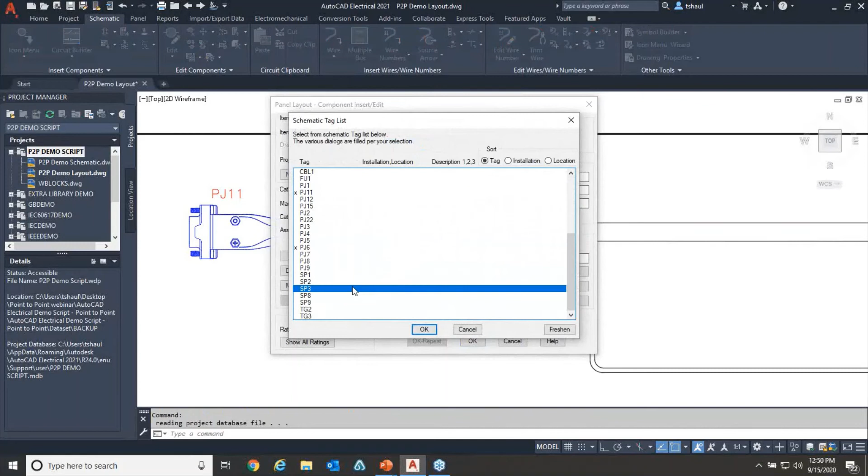What you want to do is go look at your schematic, and I do this by using the schematic list. And if I look through here, splice 3, SP3, that is the splice that was on the other page. So I'm going to click OK, and basically that's how I can build that link. You can see how simple it is. I'm going to click OK. Now that's linked to that splice on the other page.

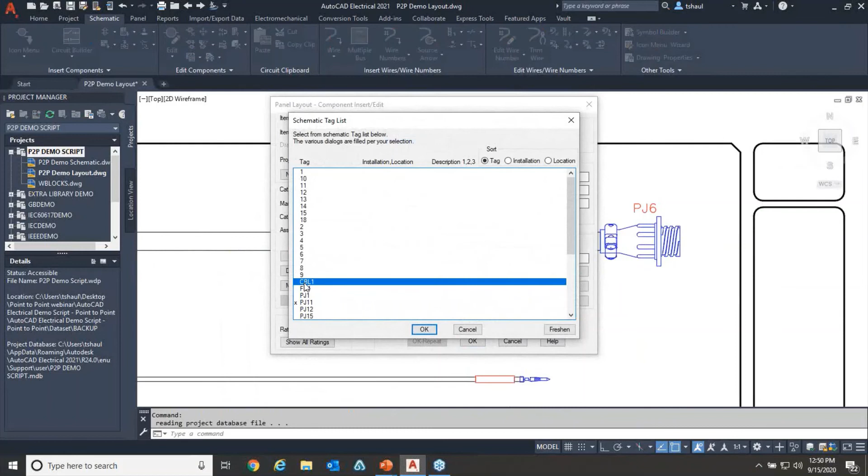Now let's also do that for the cable. So again, I'll just right click, edit this footprint. I'm going to go to my schematic list, and there it is, CBL1. We only have one cable that we created. It's called CBL1. I'm going to click OK. Notice as soon as I do that, it's bringing across the catalog information. So keep in mind, by not typing it in, that is a quantity of 1 for this cable in this project, not 2, because that's the same cable. It's got the same tag.

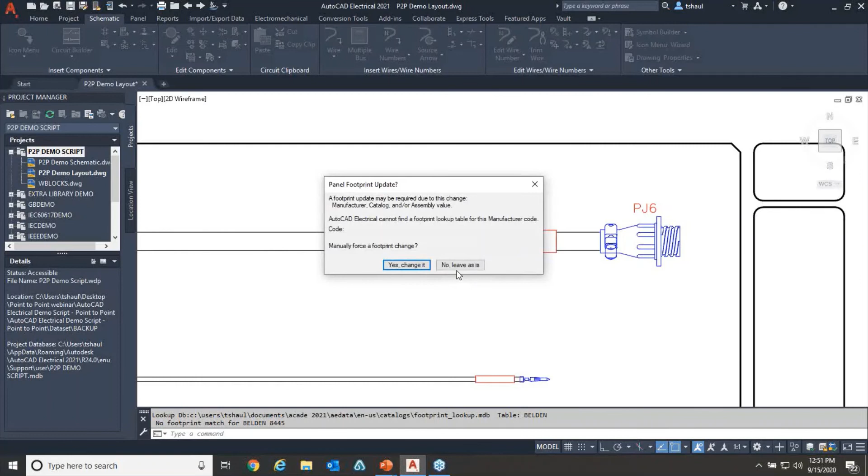We've linked them together. And to even prove that out, if I click OK here, what I can do is use the surf command. So right over here, surfer. And what it's going to do is take a look at that component. And it's basically showing me here, P basically stands for parent, pound is the footprint, and all these ones in between are the individual conductors of that cable, because this is a parent, these are all children.

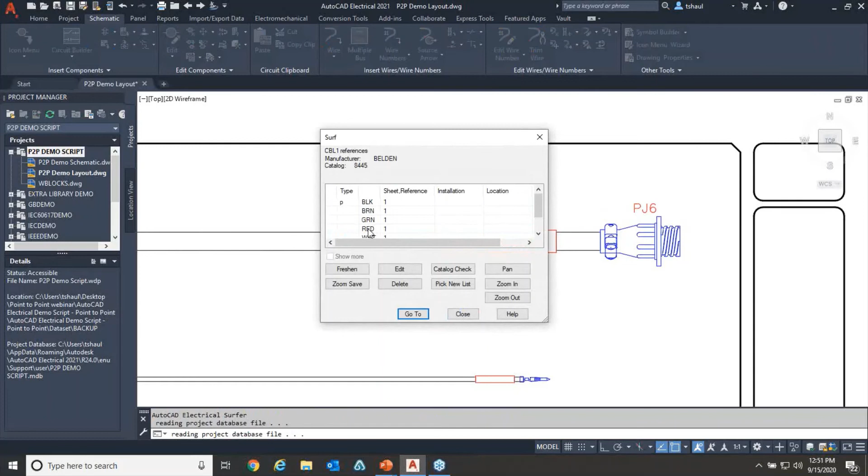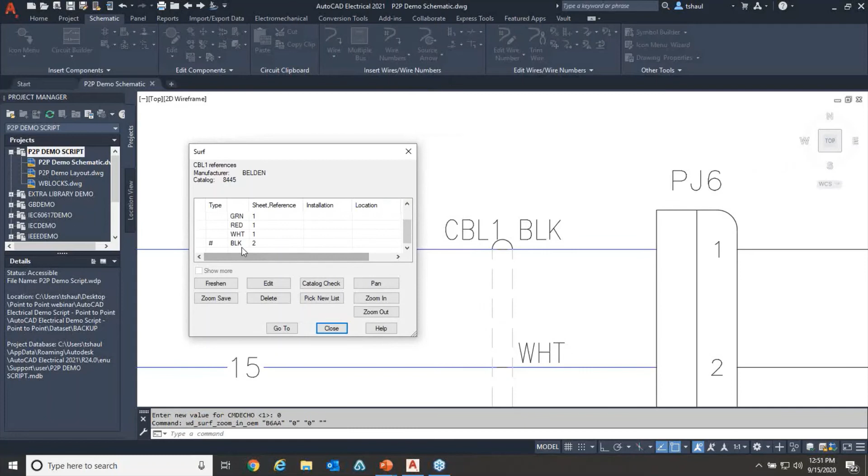So I'm going to select on that parent component and do a go to, so it's going to go to wherever that reference is, and it's going to take me to that other page, and it's going to zoom me right into that cable because I've built that link between these two components, and essentially they're just a single component with references on 2 different pages. And it's literally just that simple. And of course, if I want to go back, you go down here to this bottom one, the footprint, go to, and it's going to take me right back to where that reference is.

I know that these components are linked together, and the software is smart enough because there's some intelligent error checking. If I were to delete one of those, the software is going to ask me if I want to search anywhere it was referenced. So it guarantees that you know you should go clean up other pages in your drawing when you delete something out of one sheet. It may need to be deleted in multiple sheets.

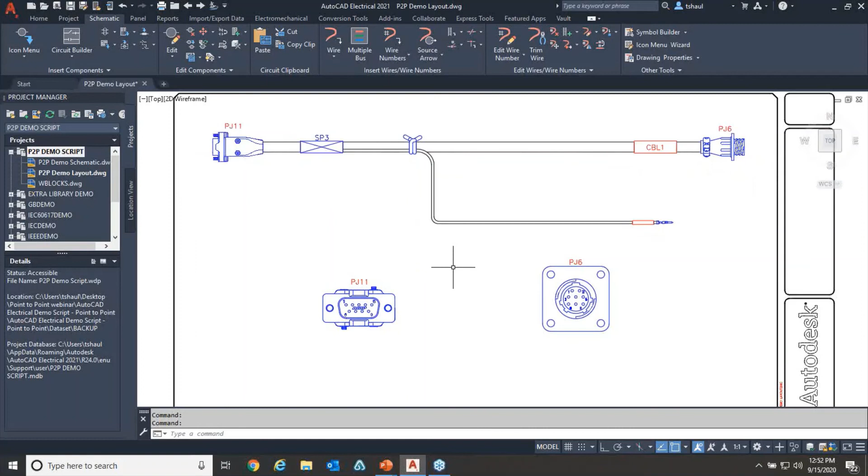Now the next thing we're going to look at is the pin information. We've got these connectors, and you can see we have several references. This PJ6 is actually referenced in 3 different locations. You have the schematic, and up here showing how the cable is connected together. So this is the cable, these are the connectors, this is where the splice is. But beyond that, it's also connected to this down here.

Why would you want to do something like that? It's because you want to know what pin goes to what wire. You want to know exactly how this cable is wired, not just the simple representation, but how it's wired. It's going to make that guy in the shop's job really easy, because he's going to see exactly how to do this. And we have the ability to show wire annotation.

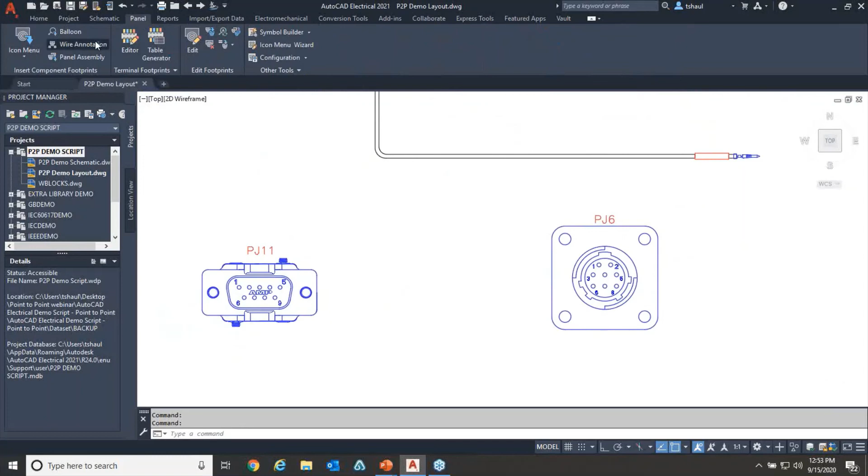I'm just going to do this for the couple of components I want to pick on. We could show multiple different attributes here - wire numbers, wire layers, wire tags, all this different information. I'm going to show it as the wire number, so tag and terminal, wire number. So that wire number I just added on the other sheet, it knows what pin it's connected to on that connector, and that's the information I want to display. You can also do wire layer if you want to know the specific wire. You could literally have wire layer, terminal number, and wire number, and it's all the information you need. You even know what wire to pull off the shelf now.

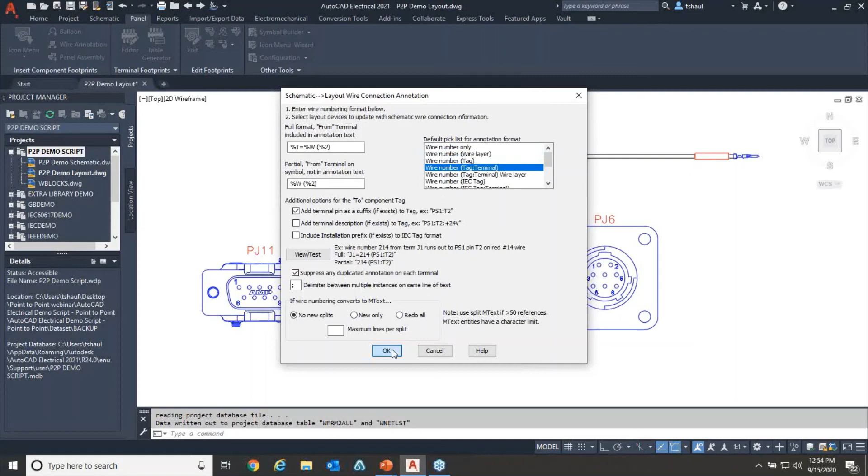I'm going to go ahead and click OK, simply pick the 2 connectors that I want to do, hit enter now, and you'll notice what we have. So we have different pin information, different connector information. Over here, pin 1, wire 14, pin 2, wire 15. And of course you could include the wire gauge and information like that if you wanted to as well.

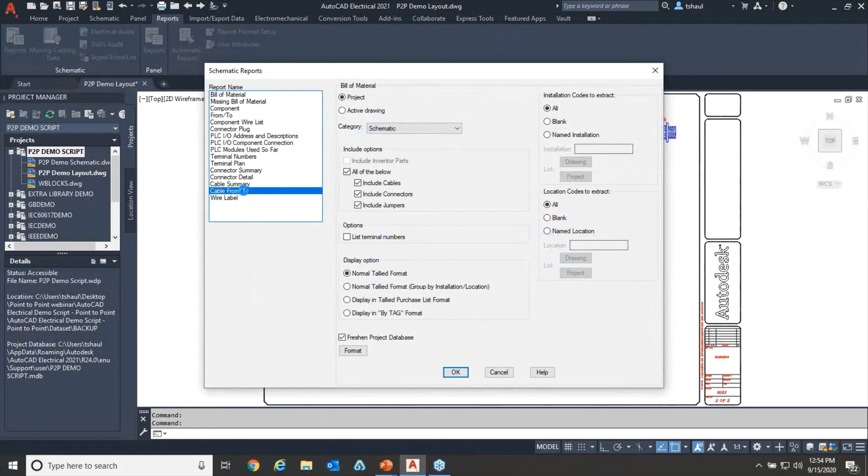Now the other thing is, maybe we also want to provide a report. There's several different reporting capabilities in the software here. I'm going to use a schematic report, specifically we're curious about the cable from-to. We're going to do this for the whole project because at this point only one cable exists, and that's what this report is going to show us. Going to select OK, we'll go ahead and save this, make sure we check all the drawings for cable information.

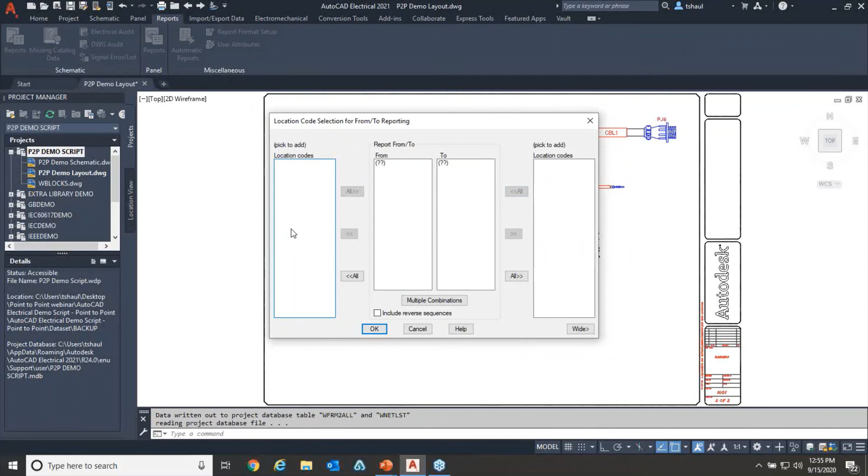This screen here, when I talk to customers in training, location codes are so important. In this case we don't have any location codes in there right now, but it's something I highly suggest in training - location codes are super important. It allows us more capabilities and flexibility in telling us exactly what's in the report. In this case it's basically just doing everything, but if we only wanted to run a report for what cable runs from machine cabinet number 5 to the junction box, you could actually have it show reports like that.

Let's get rid of that column, we don't want that information. Let's save it, click OK there. Now we've got our cable information, wire information, component 1 and its pins, component 2 and its pins. So now we have everything in this report that we need, without any extra information we don't need.

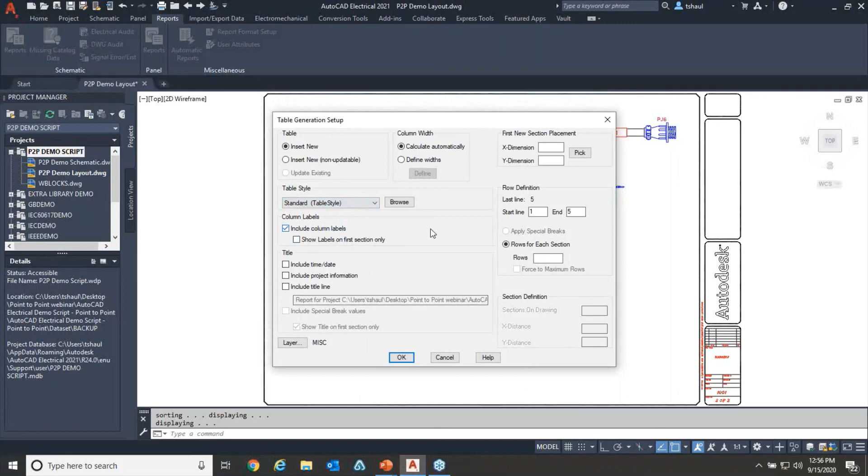They might be confusing, so I'm going to go ahead and place this onto the drawing. Of course, when you place something onto the drawing, there are lots of different options for the style of the table, the rows, the location. You can also export this to a file if necessary. In this case, I'll just drop it straight in, and we'll close out.

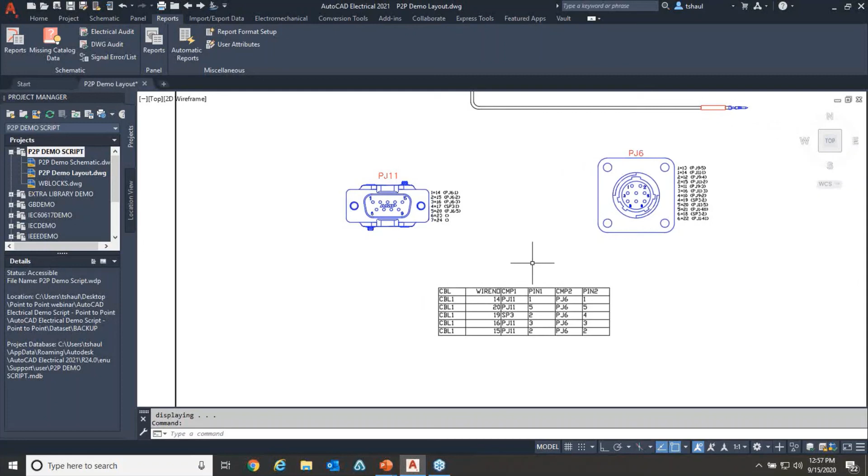Now I've got that report right in my layout document. So people can see information several different ways here. You could see what components and pins are at the component symbol itself, or simply see that information in a report. So there are several different ways to show the same information. The key is really building intelligent electrical symbols, making sure you're putting in things like catalog information, and it really ties everything together.

So one thing I wanted to make sure I did in closing is talk about some of the top reasons to move from plain AutoCAD to AutoCAD Electrical. A lot of people out there are still using plain AutoCAD to do simple documentation like that, and it really takes a lot more effort to do that same level of work in standard AutoCAD than in Electrical, because you have that specialized tool set built for you.

And because it includes things like the library, automatic wire numbering, the ability to do real-time error checking and build out reports, understand cross-referencing between components, coils, contacts, or even connector to connector, multiple references of the same component in there. Smart panel layouts, that connection - if one thing changes, you need to update the other thing, okay?

And don't forget all those electrical specific tools - the scoot command, very handy, just slide things around from one place to the other. Multiple wire bus, creating multiple wires at the same time and connecting those different things together. Wire types, so you have an understanding of all those things. There's a lot of other functionality we didn't have time to cover today, and certainly we could have a more in-depth conversation if you want to reach out to me. We can talk about these things, okay?